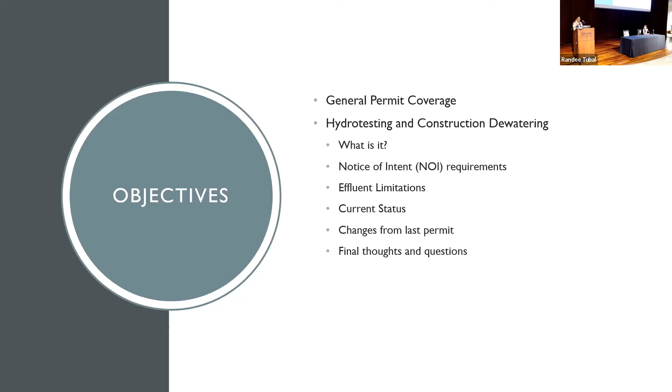Okay, so NPDES general permit coverage, what is it? A general permit is a permit that's issued to lots of people because you guys are doing the same type of activity. So there's one permit that covers many permittees. It is discharge and activity specific, and it's really a one size fits all condition. So you submit your NOI, like all permits, it's 5-year coverage. And then we issue you the notice of general permit coverage.

And then the clincher with this is that you can't really modify it like you would be able to for an individual permit. And while it may seem like the general permits are maybe more difficult to enforce, they're actually a little bit easier because they're so prescriptive, and so many things are required up front that it's protective in that way.

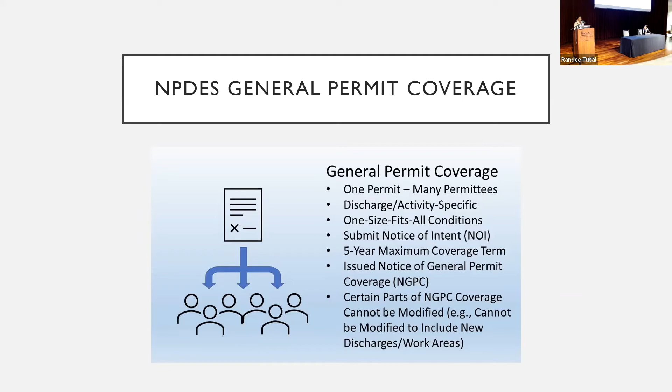Okay, so appendices F and G were renewed this year, January 15th, and it's good until January 14th, 2027. Did anybody in this audience have previously existing coverage for either F or G? Anybody?

Oh, Jamie did. Oh, you did. Oh, she did in her past life. She just came back to us.

But she did. So if you had previous coverage and you did not file a new notice of intent by March 16th. Oh, you did? You had previous, did you file a new NOI? Okay, yay! By March 16th. Okay, so you had until March 16th to file a new NOI. If you didn't, then you're no longer covered. So if anybody in here is doing F and G and you did not file a new NOI, come in. I think emails went out too, but who knows? Anyway, you guys are all warned now and aware.

What happened if you didn't file? If you didn't file for continued coverage, then your permit, you're not covered right now. I'm just posing a hypothetical. Yeah, you wouldn't be covered right now. We're good with hypotheticals. I'm sorry, who do you work for? No, I'm kidding. Yeah, if you did not file by the March 16th deadline, then you would not be covered right now.

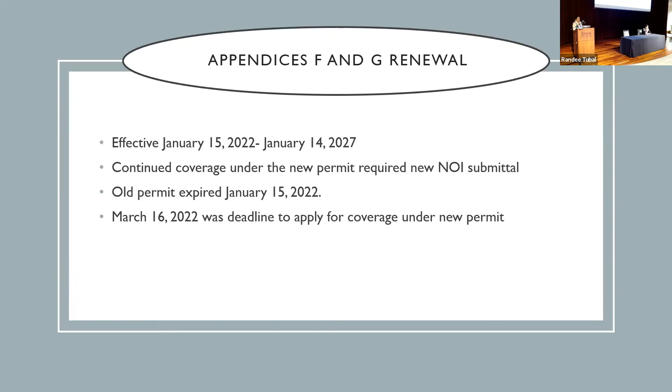So, okay. Oh, that's a good segue into my, did you need permit coverage? If you guys need permit coverage, there's really good directions on our Clean Water Branch website for how to apply. So just go on the website at that blue link and you can go through the e-permit. But if you have questions about how to apply, don't call us. Don't call enforcement. Call the permitting section because that's more their kuleana.

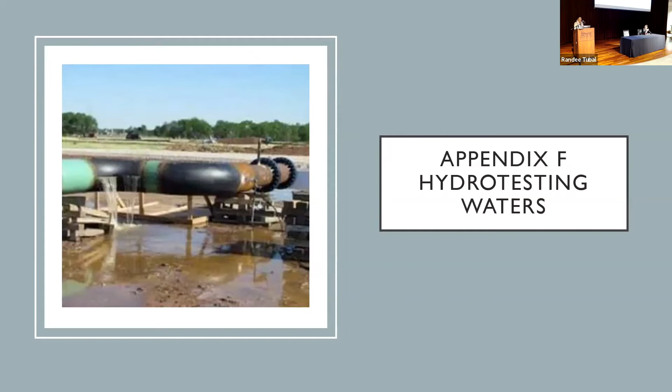Okay, so hydrotesting waters, Appendix F. What the heck is it? I just learned a lot for this talk. I didn't even know what it was, or why you do it, just in full disclosure. So what is it? It's the water that you use to test the integrity of tanks or pipelines, the water used to flush a tank or a pipeline, and the effluent that's used to disinfect a tank or a pipeline. So the discharges by nature would be intermittent.

So when you're installing or repairing new lines or new tanks, why is this relevant? Was a big question in my head. Why do we care? I had to ask the engineer guy in our section, when do we do this? Oh, I should ask you guys, when do we do this? Why? What was that? Red Hill. Yeah, that's what popped into my head too. What happens when we don't know the integrity? Catastrophic failure. Bad stuff can happen. So this is why it's important.

Why does it have to be regulated? Well, because sometimes there's large volumes of discharge involved, even if it's just water, or if it's cleaning water, or if it's water with chemicals in it. So yeah, thank you, Red Hill. That's what I was thinking. I didn't want to say it outright, but he said it, so it's good.

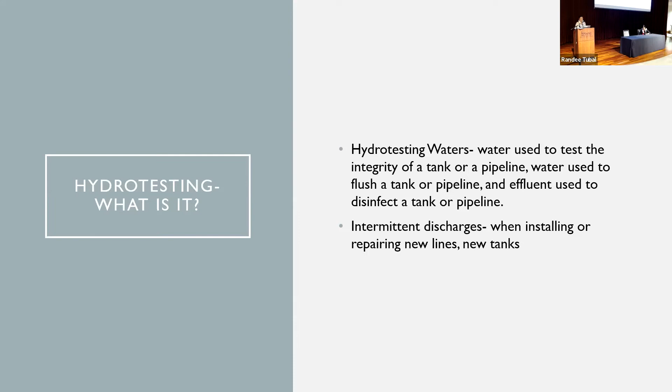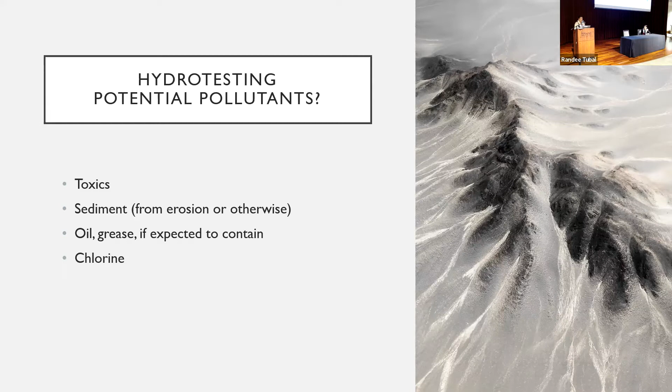All right. So what are some of the potential pollutants when you're hydrotesting? Could be toxics, sediment, because when you're letting that much water flow, where is it going? Oil and grease, if it's expected to be in your tanks or in your lines, and chlorine, since you're disinfecting. So the new permit is really geared toward looking at those pollutants.

So for hydrotesting, a lot of this stuff is asked for upfront in the NOI requirements. Super helpful because before you start your project, you got to have all your ducks in a line. So it asks for a project description, an analysis of your hydrotesting water, what's in the water that you're going to be using, what potential pollutants are in there. It asks for a hydrotesting BMP plan up front, and because you're required to sample for your transmission line, you have to calculate the quantity. And then the basic water quality criteria have to be met, and you have to inspect the receiving state waters. So when do you need this permit? When you're going to discharge to state waters.

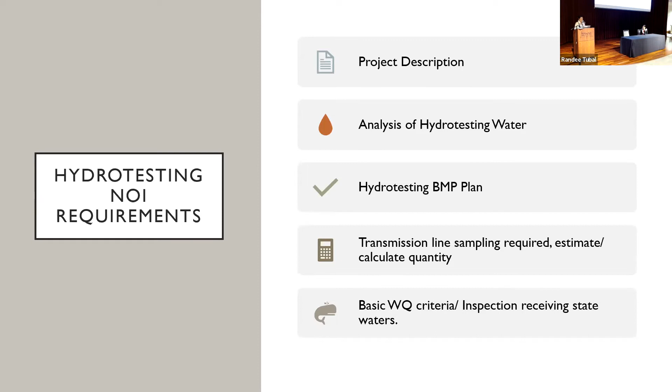I was a lab geek before, so yeah, test kits, that's awesome. That means you can take your kit on site. You don't have to freak out and rush and get your stuff to the lab in whatever the hold time is, but you can just test it there, as long as your test kits are compliant with 40 CFR Part 136 and their detection limit is at 20 micrograms or lower. So for field people that go out and do that kind of stuff, that's a huge relief.

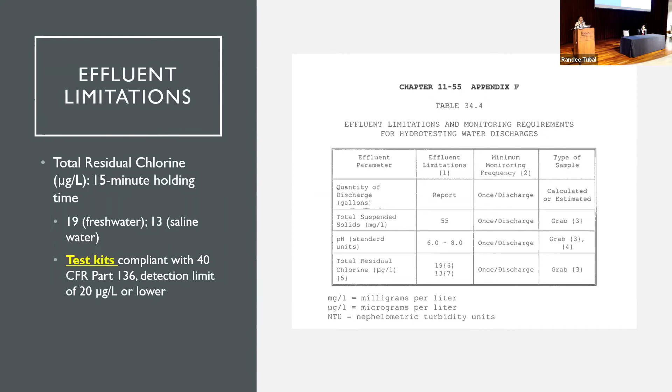Okay, and then the other parts of the permit, you have corrective actions, the reporting requirements, and submittal requirements. And of course, you have to also comply with Appendix A, like all permits. Everybody forgets that. Not only do you have to comply with F, but you have to comply with A. And those are the standard conditions.

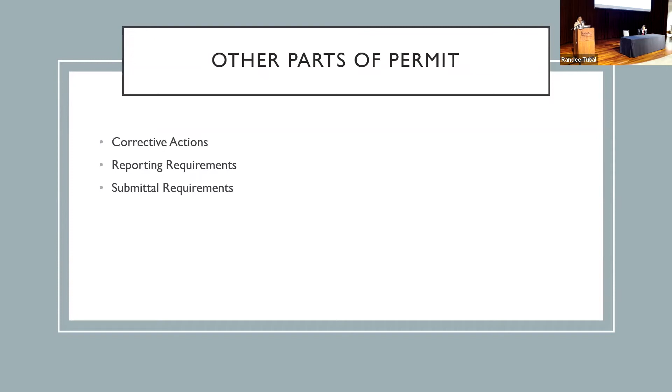All right, so what's the current status for Appendix F? For those of you that did or did not renew, I don't know what your status is, but we currently have 38 permits that I was able to see for general permits. And Board of Water Supply probably has the most of those permits. And also we see these types of permits, hydrotesting waters for larger developments that have a lot of water infrastructure.

And then I believe it was Cody in our permitting section, he comes up with these frequently asked questions, which is super helpful. And if you guys think you may need an Appendix F permit, I would suggest you go there first. Yeah, and that is what I have for F. Does anybody have questions about F? Because I'm gonna move on to G.

No? Okay. Have you guys had to apply for F out there and comply with F? No? Anybody? No? All right. I'm just curious because I don't know that we've ever actually done inspections for F. So, yay! Okay, 2 people.

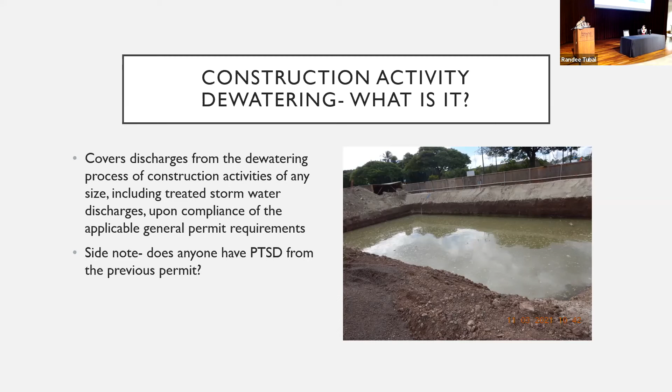All right, so when does it apply? So construction activities that require the removal or displacement of water that's going to be discharged into state waters. That was my paraphrasing. I'm like, when do we use this thing? Okay, so if you're digging a hole and there's groundwater because the water table's high and you need to discharge that water into state waters, that's when you need to get a permit.

So some examples are you're replacing or repairing a bridge and you have to dig the footing piling things and you're hitting groundwater. Or if you're digging a tunnel, you would be hitting groundwater.

Yeah, separate from, and then, you know, Gavin in our section, he likes to ask, but what about this? But what about, when is it a water transfer? And blah, blah, blah. And like, I don't know, Gavin, but I think basically if you're doing groundwater to like a surface water, that's when this would be most applicable. But again, permitting section.

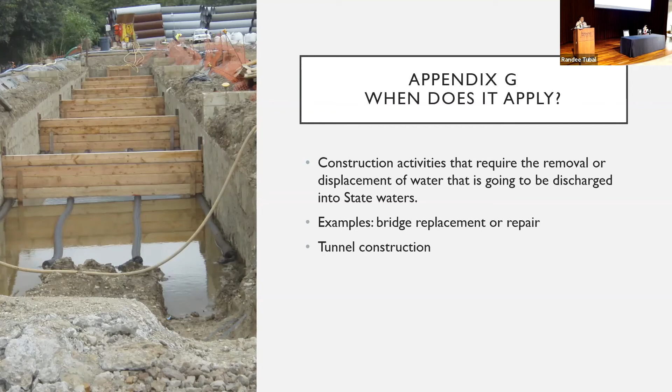Okay, so what are the NOI requirements, the notice of intent requirements for Appendix G? You have to have a site characterization report. So you have to know the history of the site. So what are you expected to see when you hit that groundwater? Like, was it industrial before or whatever? You need a project description, disturbance area, it includes the disturbance area portion of the project that needs construction dewatering.

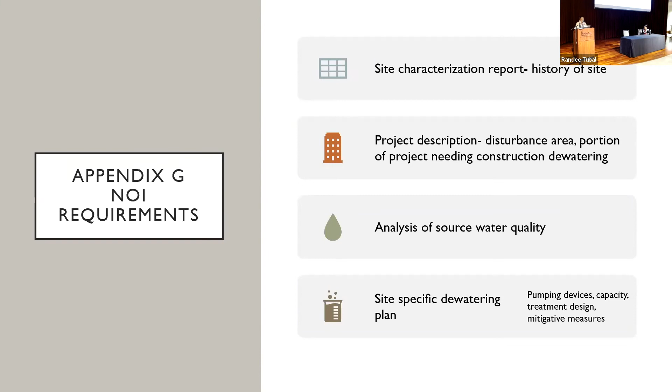You have to submit an analysis of the source water quality, and you have to have a site-specific dewatering plan, which would include things like pumping devices, what is the capacity of your pumps, what's the treatment design, and what are some mitigative measures. You also need a construction pollution prevention plan, which includes the practices you're using to control project site runoff, spillage or leaks, sludge or waste disposal, drainage from raw material.

So the construction dewatering oftentimes, obviously, goes hand in hand with Appendix C, but Appendix C only handles the stormwater from your construction site. This is the water that's on your site that you need to get out of the way so you can do your work. And for the dewatering, you also have to have a dewatering system maintenance plan. So this includes an operations plan, like what are you going to do with your water? How are you going to maintain your system? It's like a BMP plan for how you're going to dewater your site. And that includes monitoring and visual inspections and an effluent control plan.

So again, a lot of stuff is asked for upfront, which is good because it forces you to think about it and say, this is what we're going to do. And then we have a record of that. We have a copy of that. And then when we go on inspection, we say, this is what they said they're going to do. Is this what they're doing?

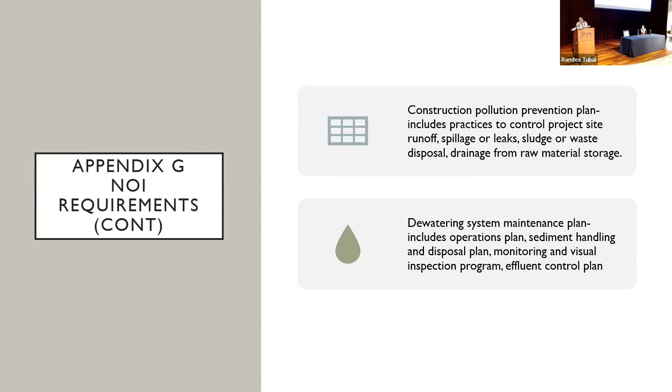Okay, so the permit requirements for this one, you have to treat your dewatering discharges, right? You can do that with sediment basins or traps, socks, dewatering tanks, tube settlers. You can do downstream erosion controls because, again, you don't want to erode the stream banks or whatever. So you can use vegetated buffers or check dams or riprap. You don't want any visible plumes. You get a lot of calls because there's plumes, a lot of times from construction activity.

No floating solids or foam. And if your water contains oil or grease, you want to use oil water separators. And to the extent possible, use upland vegetated areas to infiltrate before it actually discharges to state waters. And you want to, again, dissipate velocity to minimize the erosion risk using like check dams or other devices.

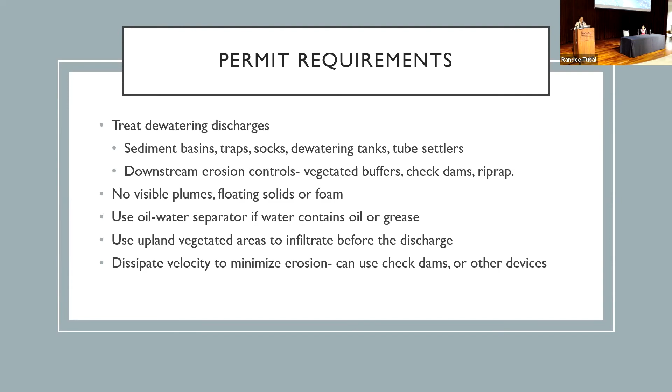This is in Manoa, by the way. Did you guys know that? Manoa Park. No?

So they tried, but it was unsuccessful. So if you're out on the site and you see something like this happening, figure out something else, because this clearly is not working. And that's okay. That's why you have to have your plans on site. Because if you say you're going to do it, you try it and it doesn't work, hey, you can change it. That's the beauty of all of it. Just make sure you sign and date when you did change it, because we'll check that.

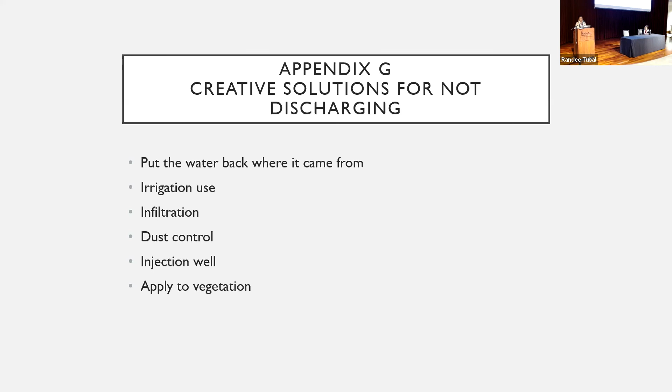Use it for dust control. Injection well. I'm not a huge fan of injection wells personally, but it's an option. Or you apply it to vegetation. If at all possible, you don't want to discharge to state waters if you can help it. So yeah, think creatively.

Okay, so these are the effluent limitations and the monitoring requirements now. All it is, you have to know the quantity, you have a TSS limit, oil and grease limit, and pH. Is that what it looked like before? Was there a lot more stuff before? Apparently this has shrunk immensely, which is great for you guys. It's more specific to the actual pollutants.

So Jamie was explaining to me that when you're dewatering, sometimes if it's groundwater, you have a lot of nutrients in there. And so people were saying, there's no way we can comply. We're taking the groundwater out, it's high in nitrogen, and we're putting it into state waters. Before we even get the permit, we're coming to the enforcement section because we just can't comply. And it's like, well, what are you supposed to do, right? So this is a good example of how permits do evolve.

I know a lot of times, and you work for another state agency, the public especially thinks that we just don't listen and we're not taking in feedback from the public or consultants, but we actually do listen. And there are people that try to make it so that everybody's needs are met. So yeah, this is a big change. Ta-da! I should have put stars on it. It would have been better. It's just black and white, but that's the big change.

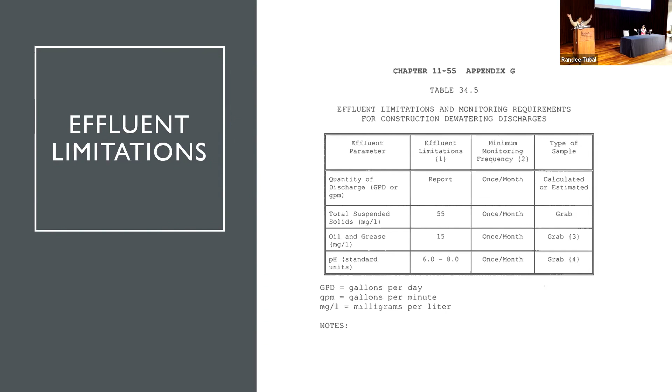Okay. And then the current status, we have a whopping 9 general permits. There's some that are individual, and a lot of it is issued to counties or state for things like bridge replacement.

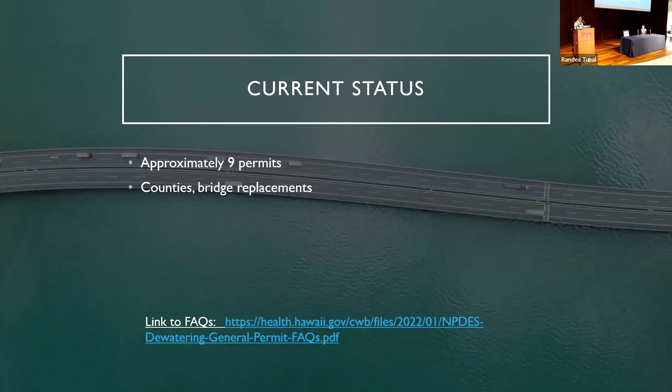Okay, and then my final thoughts on this are the general permits are evolving. We do get feedback from you guys and the public as well, and consultants. With hydrotesting, we saw what can happen when lines and tanks do fail. And with dewatering permits, I feel like it's going to be more prevalent in the future because of climate change. Rising water tables, our areas to develop are getting smaller and smaller, and sea level rise and all of that. So good thing it's a bit easier.

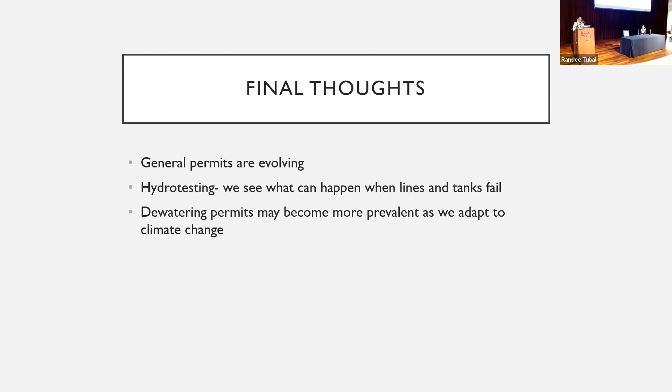Okay, I think that's my last slide. Oh, this is my last slide. Yeah. So I'll take your little tiny seeds of wisdom and let it disperse. No, but for real, I'm not kidding.